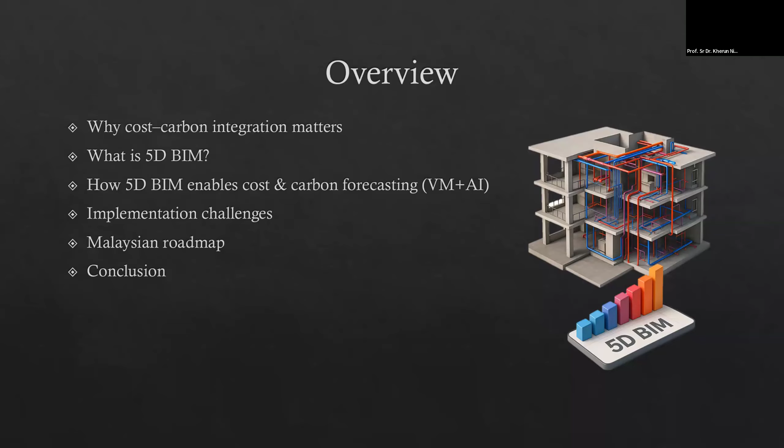I'm going to touch on the process of 5D BIM, and also in relation to that, we're going to look into the value management or value engineering exercise as well.

Globally, the construction sector is responsible for 38% of total carbon dioxide emissions. That includes both the energy used to operate buildings and the emissions from materials and construction. According to KPMG, embodied carbon, which is the carbon from cement, steel, or aluminium, transport and construction, is expected to overtake operational carbon by 2040 if nothing changes. Here in Malaysia, our national energy transition roadmap commits us to net zero by 2050, which means we must address embodied carbon in every new project, not just focus on energy efficiency.

Here's the critical insight: 70 to 80% of a building's lifetime carbon is already locked in during the early design stage, when we choose materials, the structural system, facade, and construction methods. Once these decisions are made, the carbon trajectory is almost fixed. This is why 5D BIM is relevant, and I want to say powerful, because it lets us see the cost and carbon impact before design is finalized.

So people often ask, why do we say 70 to 80% of carbon is already locked in during design? Firstly, material selection is made at concept design, and materials are the biggest source of embodied carbon. Concrete, steel, aluminum have high carbon factors. Timber, recycled steel are much lower. Once you choose the material palette, your carbon trajectory is essentially set.

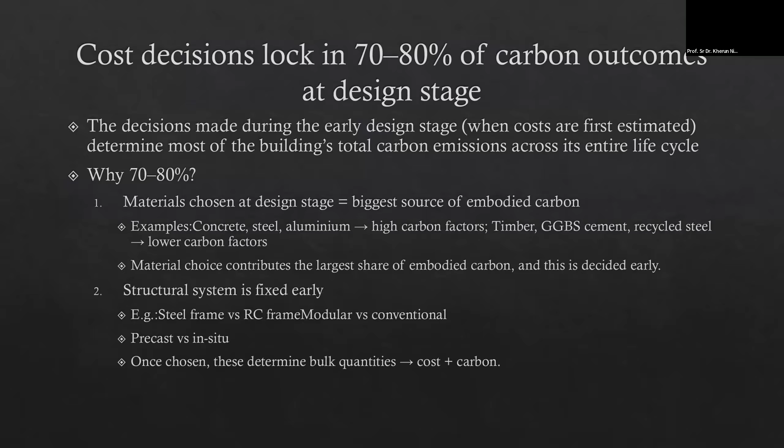Secondly, the structural system is fixed early as well: steel versus RC frame, precast versus in-situ, modular versus conventional. These decisions determine the bulk quantities, which determine both cost and carbon. Thirdly, the building geometry, floor plan, number of basements, facade ratio, orientation, all drive both material volume and energy performance. Once the geometry is finalized, it is extremely difficult to change later.

And finally, late changes are expensive or impossible, as we all know, they will incur variation. After tender or during construction, you cannot suddenly redesign a basement or switch from RC to steel. So the carbon impact is essentially set in the early design phase, which is why early stage 5D BIM analysis is so important.

What is 5D BIM plus carbon? When we talk about 5D BIM, we start with the basics: the 3D model itself, the geometry, the spaces, walls, structural elements, MEP system. 4D adds time, linking the model to the construction schedule so we can simulate the sequencing. 5D adds cost, quantities from the BIM model automatically linked to a cost database, giving real-time cost updates whenever the design changes. Now, when we extend this into sustainability, 5D plus carbon means every material in the model carries a carbon factor, just like it carries a cost factor.

So 1 kilogram of steel is 1.9 kilogram carbon emission, and 1 kilogram concrete is 0.12 kilogram carbon emission. This is the carbon factor.

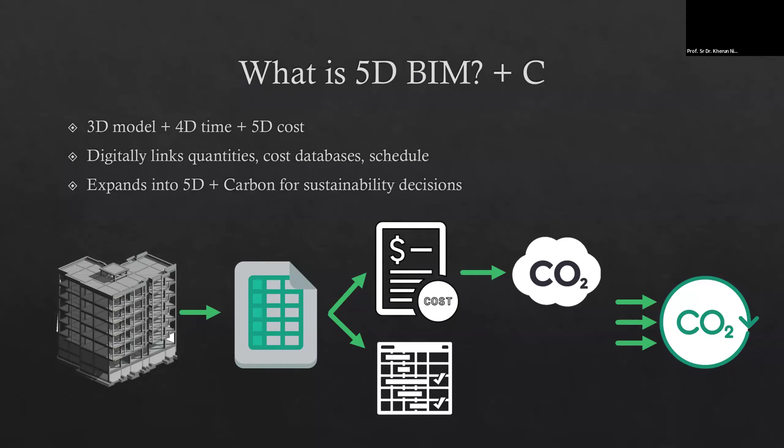So the same 5D BIM that updates cost automatically can now also update carbon automatically. In a sense, 5D BIM plus carbon equals a single digital model where design, cost, time, and carbon are all linked, giving instant feedback for sustainable decision making. And in BIM context, this is why 5D BIM plus carbon forecasting is powerful.

Because carbon forecasting gives us real predictive power. First, it allows us to test different design options while design is still flexible. At concept stage, we can simulate and compare if we switch from RC to composite, if we reduce facade glazing, or if we use other types of concrete.

Secondly, BIM highlights carbon hotspots like steel heavy floors or oversized MEP systems before they become expensive problems. Third, 5D BIM supports informed redesign. When carbon results come in, we can adjust layouts, materials, or systems in a targeted way rather than doing guesswork. In short, instead of reacting at the end, 5D BIM helps us optimize sustainability while the design is still changeable.

And let's have a look at this. These values represent the embodied carbon intensity, measured in kilogram carbon emission per kilogram of materials. Embodied carbon refers to greenhouse gas emission generated during extraction, manufacturing, processing, and transportation.

For example, steel is 1.9 kilogram carbon emission per kilogram. It is high carbon due to smelting and high energy use. In comparison, concrete is lower because it contains aggregates and water, but carbon increases when cement content rises.

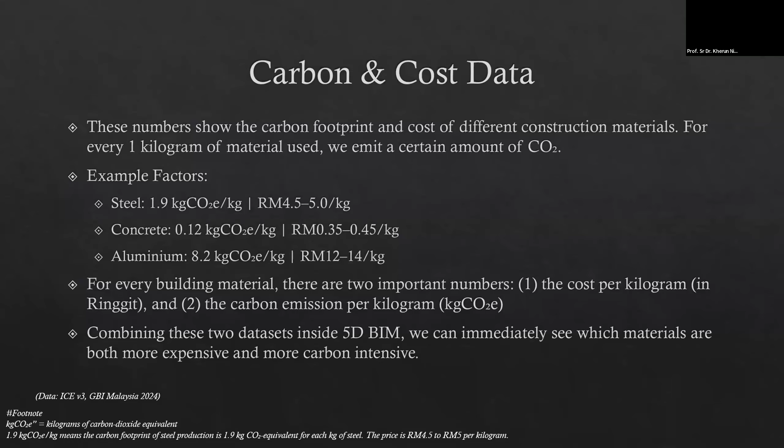So these ringgit or monetary values are typical market ranges used for demonstration purposes, not in practice. Material prices fluctuate frequently based on supplier, volume, region, and procurement method. So the purpose of this slide is to show that cost per kilogram and carbon per kilogram are not correlated. A low cost material may produce high carbon and vice versa.

So how does 5D BIM plus carbon work? Cost per kilogram shows how much we pay, and carbon per kilogram shows how much carbon dioxide we emit. When we combine this inside 5D BIM, we can compare materials not only by price, but also by sustainability. That is how 5D BIM guides better decisions.

So here's how 5D BIM actually works behind the scene. Number one, automated quantity takeoff from the BIM model. With BIM, every wall, slab, column, or whatnot has digital information. So instead of manually measuring drawings, the system automatically extracts all the quantities accurately. This is the foundation for both cost and carbon calculations.

The second step is linking BIM to cost and carbon data. Once we have quantities, we connect them to two critical data sources: a cost database that tells us the ringgit per unit, and a carbon database that tells us the kilogram carbon emission per unit. When we multiply quantity times cost and quantity times carbon, we instantly get the financial and environmental impact of the design.

Third, simulating design alternatives. The power of 5D BIM is that when you change one design element, such as material type or structure system, BIM recalculates everything within seconds. This allows us to compare multiple solutions and choose the one that offers the best sustainability value.

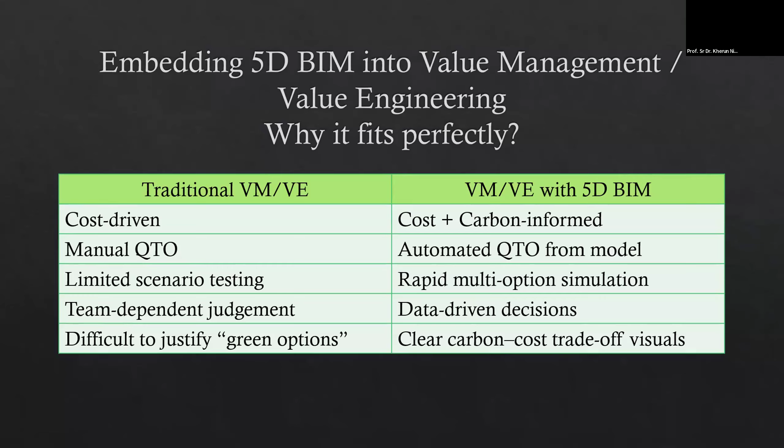By integrating 5D BIM into VM or VE workshops, all options can be assessed quantitatively, not based on intuition. BIM provides automatic quantities, material properties, carbon factors, and cost implications. So instead of debating opinion, the team evaluates data-driven alternatives. 5D BIM turns value engineering into value optimization, because every material, element, and decision can be evaluated on two axes simultaneously: cost and carbon. This means the VM workshop becomes more objective, transparent, and aligned with sustainability performance.

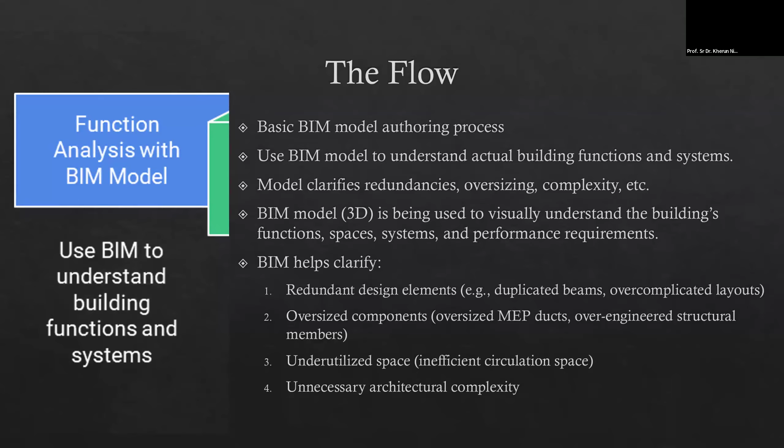So the flow I showed in this slide shows how we embed 5D BIM into the VM or value engineering process. I call it the flow. Let's look at the first one: the basic BIM model authoring process. Why does this step matter? In traditional VM, function analysis is based on drawings and assumptions. With BIM, function analysis becomes data-driven and visually accurate, eliminating guesswork. We can see the functions, systems, and conflicts clearly in 3D, which gives VM teams a more reliable baseline.

The next one is baseline automated QTO, or quantity takeoff, for the baseline. BIM automatically generates exact quantities of materials, so we can get accurate baseline cost and baseline carbon using material carbon factors. Why does this matter? VM decisions require accurate baselines. Manual quantity takeoff is slow and error prone, and BIM ensures zero duplication, real-time updates when the design changes, and one source of truth for cost and carbon. Without the correct baseline, VM lacks credibility. 5D BIM gives us a reliable snapshot of cost and carbon before any value options are explored.

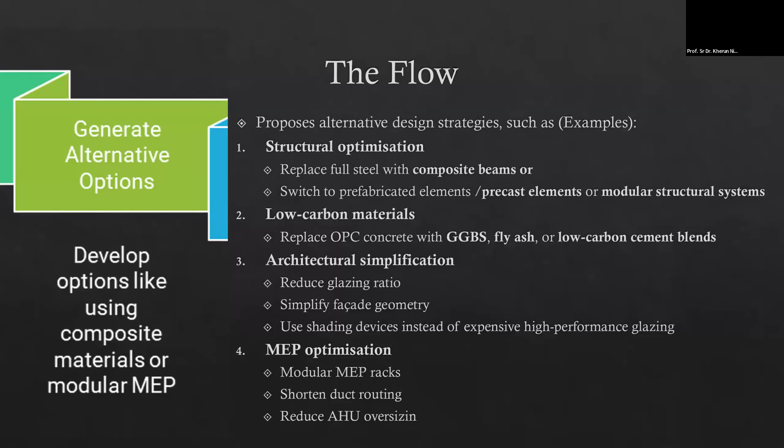The next one is generating alternative options. We develop options like using composite materials or modular MEP. This process gives alternative design strategies. Why does this matter? VM is ultimately about options. BIM allows options to be generated faster, explored deeper, and evaluated objectively. Instead of debating options verbally, BIM allows us to propose realistic alternatives based on quantifiable data.

The next one is 5D BIM evaluates the options. Why does this matter? Because VM decisions become data-driven, not based on intuition. It helps avoid value cutting and ensures value improving. This is where the magic happens: every option we test is automatically recalculated for cost, carbon, and time, and we can compare options in minutes, not days.

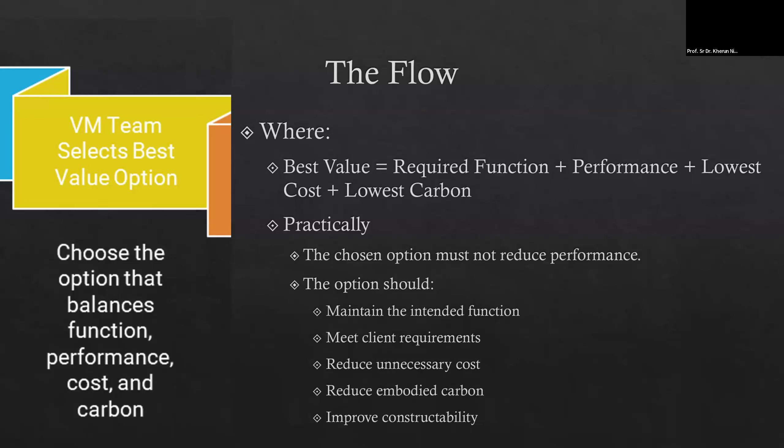Next, the VM team selects the best value options, because VM is not cost cutting. VM is maximizing value across four metrics: required function, performance, lowest cost, and lowest carbon. So 5D BIM gives the team a transparent cost-carbon matrix, and the best value option is now defensible, measurable, and aligned with sustainability goals.

The last one in the flow is to document the VM decision. Is it important? Yes, VM decision making must be defendable. 5D BIM provides evidence for audit trail, client approval, sustainability certification, like any green index tools or QS validation. So with BIM, our VM report becomes evidence-based. Every value decision is traceable, transparent, and quantifiable, and this document becomes a formal VM justification.

This is AI for pattern detection and design risk insight. Once the baseline cost and carbon are extracted, AI can immediately analyze the BIM model to detect patterns like oversized structural members, unnecessary MEP complexity, or facade elements with poor thermal performance. This helps the VM team identify where the true value problems are before we even start generating options. AI adds value here by identifying design inefficiency, highlighting high carbon hotspots, suggesting typical areas where similar projects had cost overruns, and predicting elements most likely to contribute to waste.

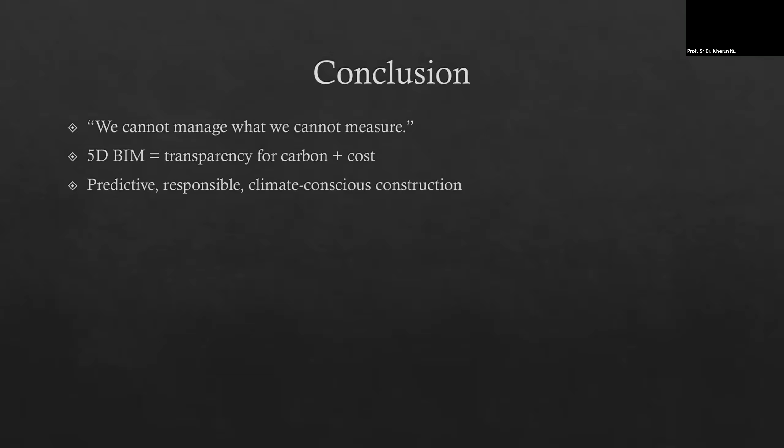As we move forward, let us commit to predictive, responsible, and climate conscious construction, where every decision is informed, measurable, and aligned with a sustainable future. With that, I thank you.

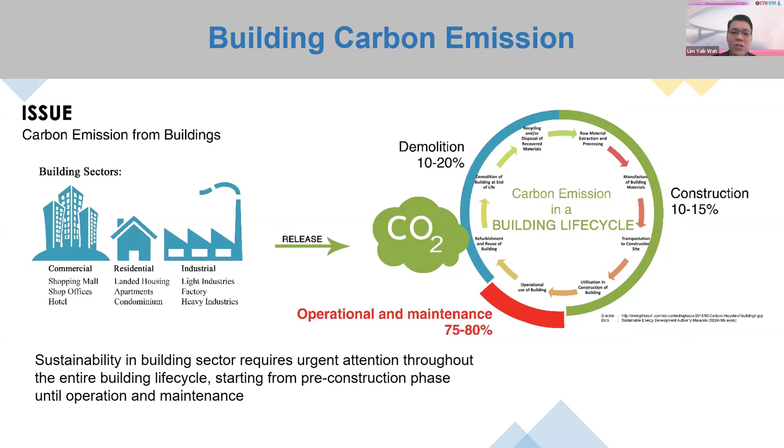So when we want to build for a more sustainable future, we need to look into the entire building life cycle, from the design, construction, until operation, until even demolition or refurbishment at the end. Because our design decisions at the beginning of the project will contribute very much to the operational stage, which is about 75 to 80% of the carbon emission.

The building industry is considered one of the most inefficient or wasteful sectors compared with other industries where they have adopted more advanced technology in terms of sustainability. That's why BIM, Building Information Modeling, has been recognized as a platform for sustainable or integrated building project design and delivery. BIM is a platform where every party in the building industry, including architects, QS, engineers, facility managers, share the same platform for information so that we can optimize the design.

The benefits of BIM include better collaboration, enhanced performance, optimized solutions, faster project delivery, and reduced wastage, as I just mentioned there's a great amount of waste from the construction industry. If you look at the photo on the screen, there's a BIM model of my office in the faculty.

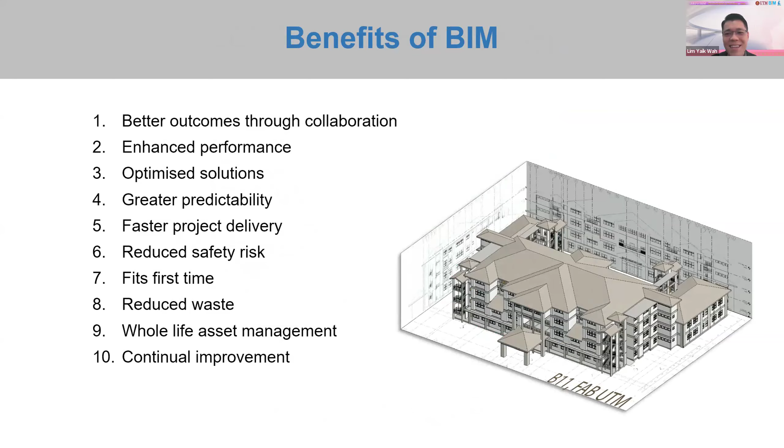Looking at BIM, I think most of us are familiar. There are 3D, 4D, 5D, 6D, and 7D, as just mentioned by Prof. Kherun Nita, about 5D BIM, which is for cost estimation, and 4D is about scheduling the time. But today I want to focus more on sustainability, which is the 6D BIM, using BIM as a sustainability design and analysis tool.

For example, then go for green building certification like LEED, GBI, GreenRE, and so on.

In BIM, we have different levels of development. Like in the conceptual design stage, we call it LOD 100, where it's just a very approximate geometry, while LOD 200 is more schematic design, and 300 has more precise geometry. 350 is for tender coordination, 400 during construction and fabrication, and 500 is as-built.

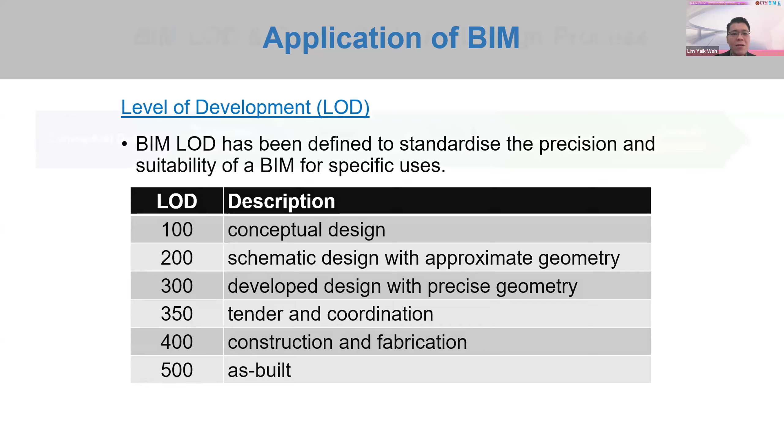So today I want to try to show how LOD matches with the green building design process using BIM. We know in a project design, not only the conceptual design, we have schematic design, development, tender and coordination, construction, as well as as-built.

So at LOD 100, that means the BIM model is just a very conceptual massing, even without any openings, any structure, any facade design, it's just a massing. So at LOD 100, we can use BIM to do conceptual form massing, orientation, and site context analysis. The performances related to 6D BIM, like site analysis, solar study, macro wind flow, building form optimization, and green area.

While at LOD 200, where we have the form and facade, solar shading, and a more approximate geometry, then we can do the solar study for shading devices, daylighting, natural ventilation, and even zoning of the spaces.

Remember, at the early stage of design, any decision or changes will have a high impact on performance, but very minimum cost implication on design changes. So if we make the decision right at the beginning, it will determine how the building operates or performs later on. Compared with the later stage, if you want to change the design, it will require a lot of variation orders or even demolition or reconstruction of the building.

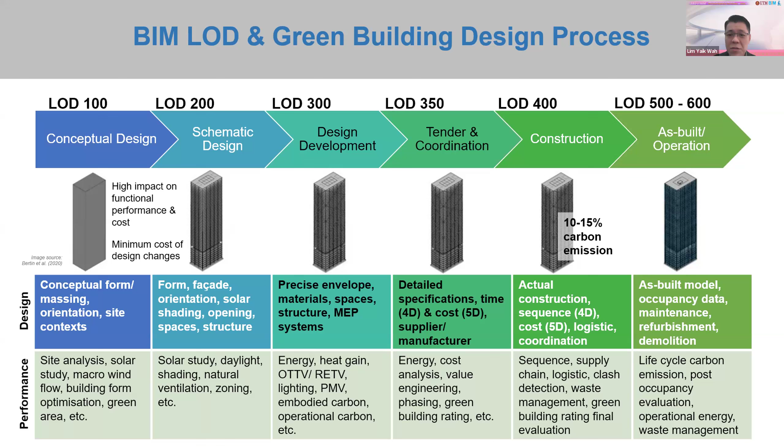While at LOD 500 to 600, which is as-built or the operational phase, we can look into the life cycle carbon emission, the post-occupancy evaluation, and continue to monitor the building performance using BIM. And that accounts for 75 to 80% of carbon emission. But remember, at the design stage, even at LOD 100, 200, that will contribute a lot into the operational phase.

So here we sum up how we can use BIM throughout the different stages in the project life cycle to do different kinds of 6D BIM analysis in order to design for more sustainable futures. And these are just some examples of 6D BIM tools, for example IES, Design Builder, or Ecotect.

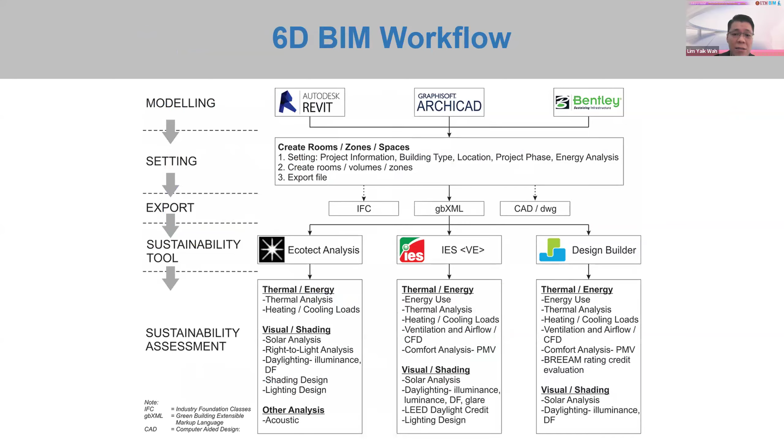And this is the workflow of 6D BIM, where we can export the model from the BIM modeling to gbXML and import into some of these sustainability analysis tools for thermal analysis, visual, or energy.

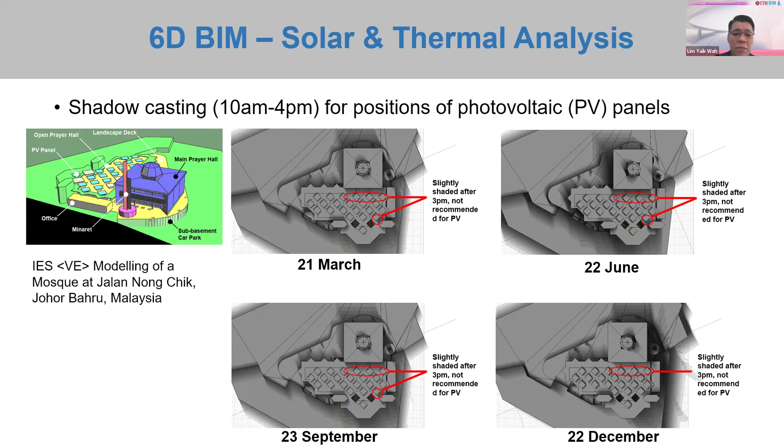Just some quick examples of how we can do solar analysis using a BIM model compared with the actual construction. And these are all real projects where we did even thermal analysis on how the shading, the placement of the photovoltaic panel on top of a mosque building, which has been completed.

And this is another example of using CFD to see the macro wind flow and also the PMV thermal comfort in the buildings, and this energy analysis.

Next I want to talk about some of the research on BIM for sustainability. In our research team, we look into green building evaluation, BIM, and also computational algorithms. So we try to integrate these three aspects into our research, where we start with the BIM model.

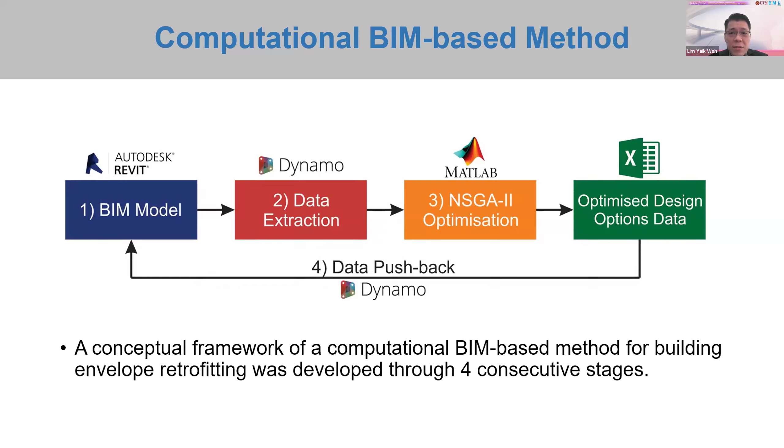Then we extract the information from the model using Dynamo, which is a visual programming software. And then we input it into MATLAB using the NSGA2 optimization algorithm, which is a genetic algorithm for optimization. And then with the optimized result, we push back to the BIM model using Dynamo so that it automatically updates the BIM model.

So this is an example of the workflow that we have done in Dynamo as a visual programming tool, and the example of the model that we've done in Revit. And with one click in the Excel spreadsheet, because it's linked with Dynamo, all the information related to the building facade, the U value, the VT, are all captured automatically with one click.

And all this info is extracted from the Revit model. From there, we can use it to calculate the green points for the OTTV, and straight away you can see the point for the RETV. So this is how we can use BIM for information management and extract the data to do calculations or analysis, so that we can automate or simplify this whole process for green certifications.

And this is a real case example that we have done in my office building at UTM. This is where the BIM model has been constructed, and then we use that workflow to optimize the facade design.

We come up with two scenarios. One scenario is that we want to optimize window only, and the variation of the window area increment or decrement was limited to 20% variation.

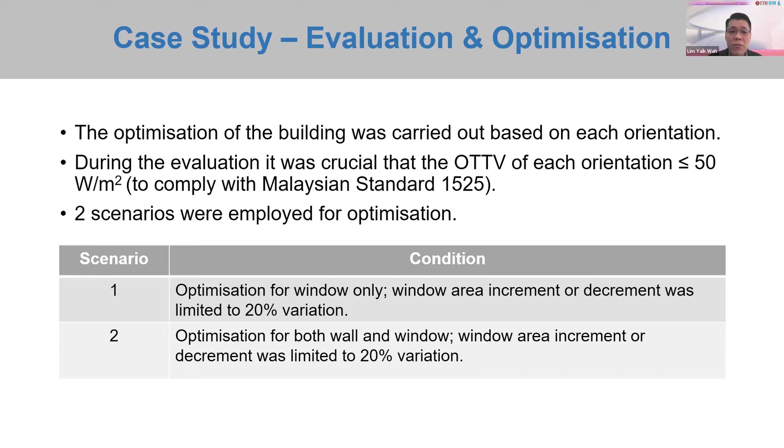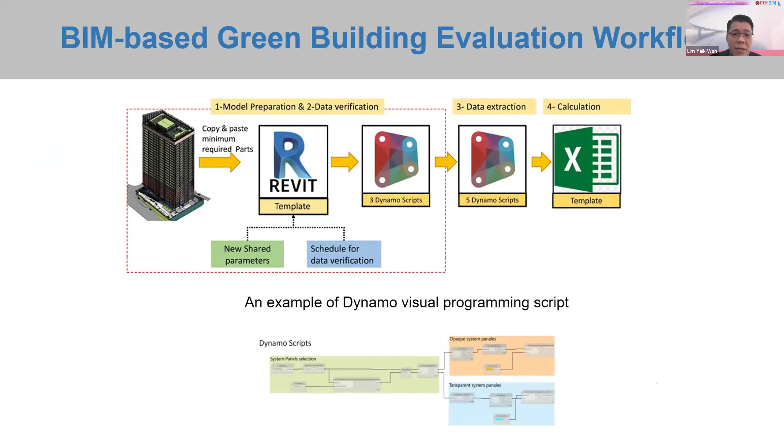Then we further study with other case study buildings, for example the TRX Project Unity Tower in KL, using a similar workflow, but not only looking into the OTTV - we also look into the GBI performance, including OTTV, energy performance, and also materials assessment. Like for example, in GBI there's a criteria on the recycled materials.

There's a criteria on the use of components of regional materials within the local industry. So that's where we can do material take-off in the BIM Revit.

We created the schedules for material take-off. Then from there, we calculate using Dynamo, then we input the calculation into the Excel spreadsheet in order to give the results of how many score they can achieve in the GBI.

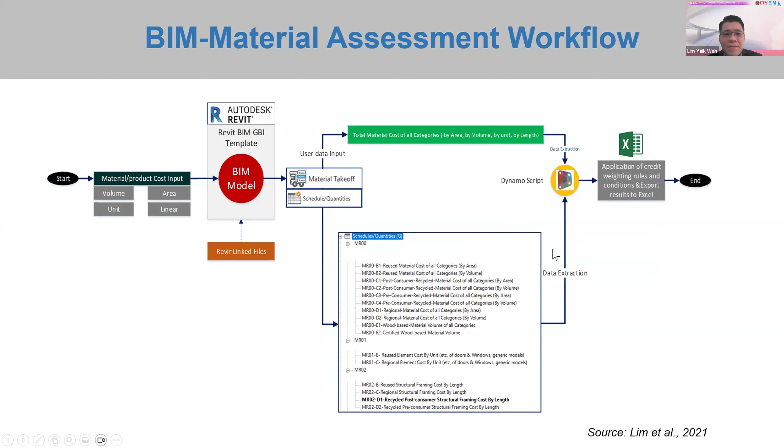To further explore this research, there's another project funded by the Ministry of Higher Education under the PRGS grant. Then we not only looked into Dynamo as a visual programming tool, but we went into our own programming to develop a plugin, an add-in into Revit.

In this project, we come up with a BIM model. Then with templates like the RTE, RFA files, we automate the data extraction and process. Then we created a plugin, a Revit add-in we call BIMGes, in order to automate the process to evaluate based on the green RE criteria: NRB 1-1 OTTV, 1-3 building envelope, NV, MV, daylighting, and electric lighting.

We link it with a website with a database where users can download the templates and also the material properties. We have a library where, for example, users can download the Windows library, the wall material library, and so on. Basically all of these are the RFA file, the families file in Revit.

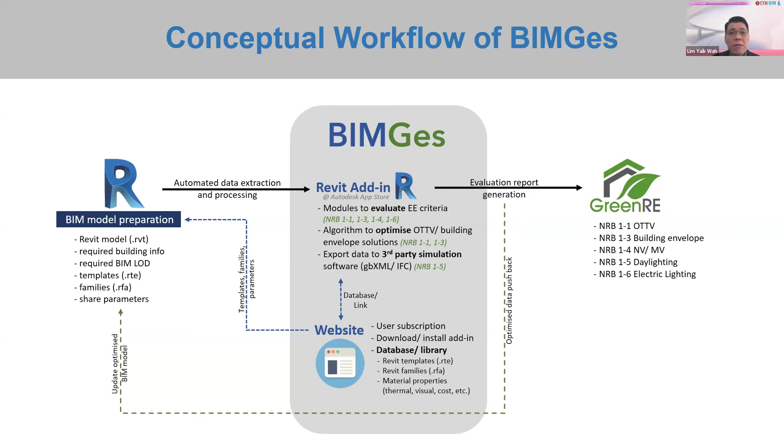And again, we automate the pushback of the optimized design into the Revit model. This add-in we developed using Python programming, rather than using VPL, so that we can develop an add-in that we can install into Revit. This is the example I want to show in the video.

So here's the example of a model that has been developed in Revit. This is the add-in we have created and installed into Revit. This is the user interface where it will automatically detect the scenario of the building design, whether it's an aircon or non-aircon building, based on the zoning that you have modeled in Revit.

From there, we can detect if there is any interblock shading from any floors. Then click next - if you do model checking, you can see that all the walls that have been detected are highlighted in different colors to represent different orientations.

And then straight away, it gives all the results of the OTTV with just one click, and tabulates all the results for each floor and each orientation, which can be exported to Excel spreadsheets.

Because when the green building consultant needs to submit for green certification to green RE or GBI, they need to tabulate floor by floor. So we customized the reports to suit the formats to tabulate all this calculation floor by floor. But the user doesn't need to do it by themselves, just a few clicks.

But not only that, in step 4 we can even optimize it using the NSGA tool. Then we can optimize the composition of different kinds of building materials or window sizes in order to reduce or achieve certain compliance.

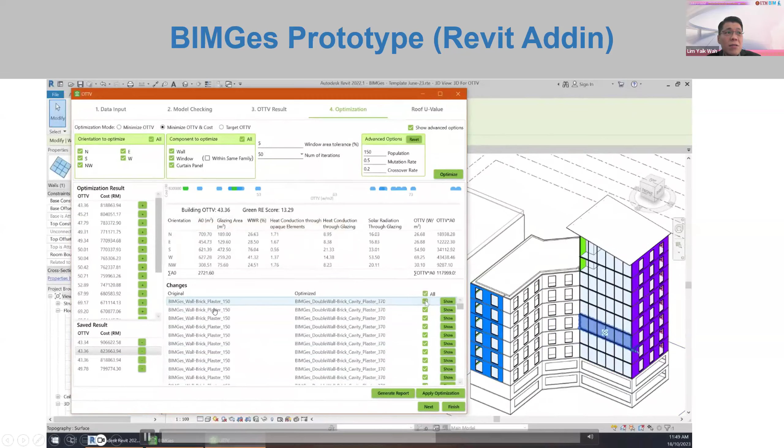This is how we can look into the changes. It will tabulate all the original and optimized results, and we can click show. It will display in the 3D model which part has been optimized, which part has changed, and what materials are involved, all based on the libraries we have in the Revit model.

We can also export into an Excel spreadsheet, and it will give the results. Just now was the OTTV; now I'm showing the building envelope, like how many percent of the west-facing facade or window is shaded with a shading device. All this automatically calculates the points, and we can export into a PDF file that can be submitted for green certifications.

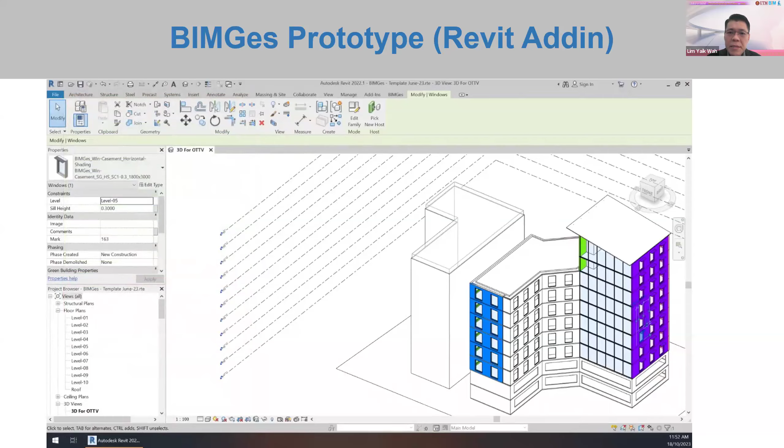From here, we are exploring the potential of using BIM and programming algorithms to optimize the design, not only evaluation but also design optimization, and then generate reports for green certifications or any design report needed. The good point is that all the optimization can automatically push back into the Revit model, updating it for design evaluation.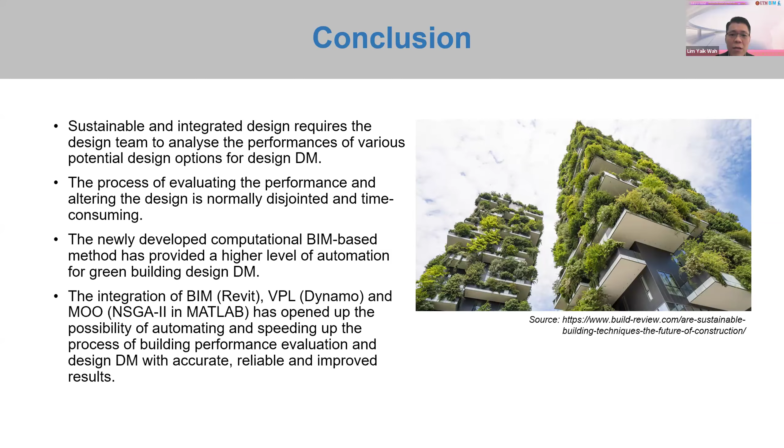Many designers say it is very time consuming to do all this analysis, but with the use of BIM and computational algorithms, it can actually become much more effective. BIM is a platform that can provide a centralized database to optimize the project design and delivery.

That's all from me. Thank you very much.

Thank you so much, Associate Professor Dr. Architect Dr. Lim Yaik Wah. From my understanding of the keynote, the points lead us into the future of sustainable design, where BIM becomes a powerful catalyst for smarter planning, resource efficiency, and low impact development using the power of automation. More specifically from what we heard, the use of computational BIM-based methods. I think this keynote shows how digital design intelligence can guide us towards more resilient, sustainable built environments.

Well, actually we have one question in the chat box, Dr. Lim, but since we are trying to stick with the time, perhaps we could come back to the question later if time permits. Again, thank you very much, Associate Professor Dr. Lim Yaik Wah, for the excellent keynote. Thank you, Dr. Lim. Thank you. All right.

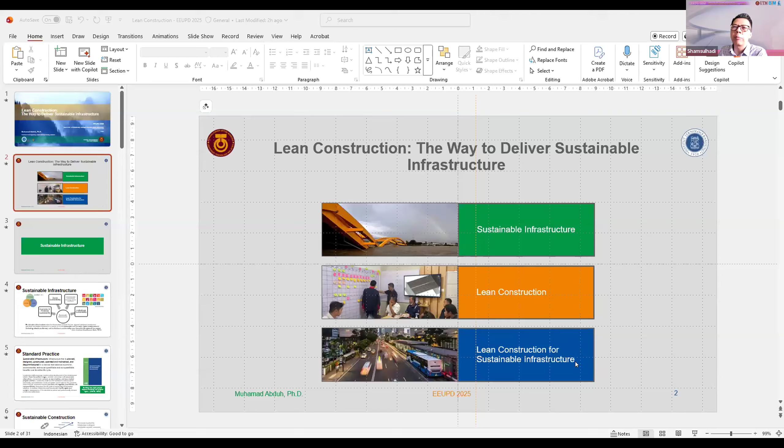Please welcome, Prof. Okay, thank you, Pak Samsul. Welcome, Pak Abduh, nice to see you. Can you see my slides? Yes, yes, Pak Abduh. Okay, so good morning, Assalamualaikum warahmatullahi wabarakatuh. I think you have to change the first screen. Presenter view, okay, wait, how about this? Yes, you can try. Okay, yes, correct. Thank you, Pak.

Okay, good morning. Assalamualaikum warahmatullahi wabarakatuh. It is my pleasure, and also an honor, to be invited to talk in this conference. Thank you, Pak Shamsulhadi, for inviting me. I would like to continue our discussion this morning.

I think the two previous keynote speakers already talked about how to design and simulate the achievement of sustainable infrastructures, mostly related to BIM technology. So my question, and the motivation of this talk, is how can we deliver that kind of very specific specification and high performance that we need to achieve in sustainable infrastructure?

So I would like to propose lean construction as the way to deliver sustainable infrastructure. This talk has three portions. First, we'll review a little about sustainable infrastructure. In the context of Indonesia, I think we need to also introduce resilient infrastructure, not just sustainable infrastructure. Then I would like to introduce what lean construction is, and at the end, describe how lean construction can deliver sustainable infrastructure.

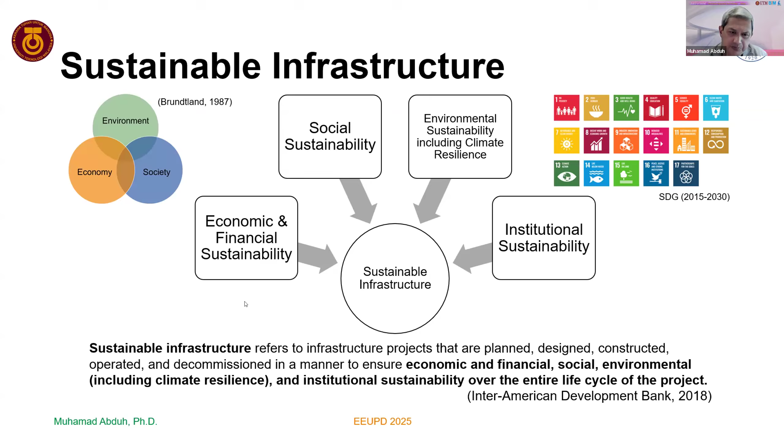Not only that, we should also consider all reasonable alternatives, including no construction—that is, do nothing—and then maybe several constructed project solutions. We also have to include life cycle cost analysis in this. But this document emphasizes that we have to not only build the project right, but also build the right project in the first place.

This is very important because we're talking about the value of the project. We should have a definition of the value of the project, and then we can deliver that value during the project, and in lean construction nomenclature, without wasting many resources.

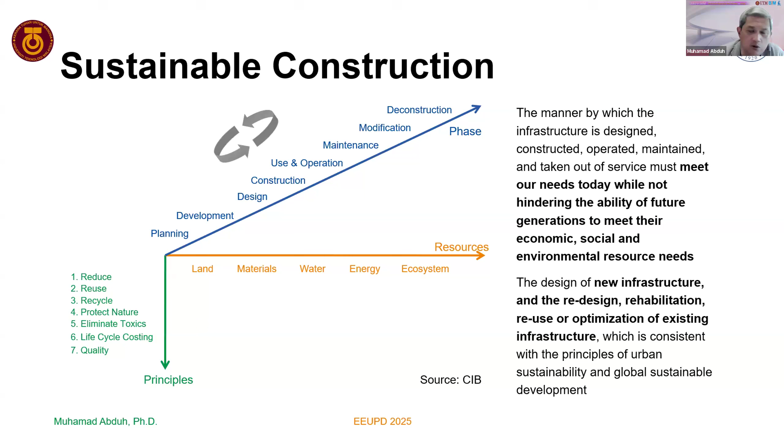So this is the sustainable construction framework from CIB. I think it was developed a long time ago as a platform to deliver sustainable infrastructure. So for all the life cycle phases of the project, we should consider all the resources, and we should apply what's called the sustainable construction principles: reduce, reuse, recycle, protect nature, eliminate toxics, life cycle costing, and also still focus on quality.

So this shows us that Indonesia is not only focusing on sustainability in the long term, but I think we still face many problems on the way to achieving that sustainability. Therefore, we cannot only focus on the long-term goal, but we also have to focus on what's called the resiliency of our infrastructure, because of these natural disasters.

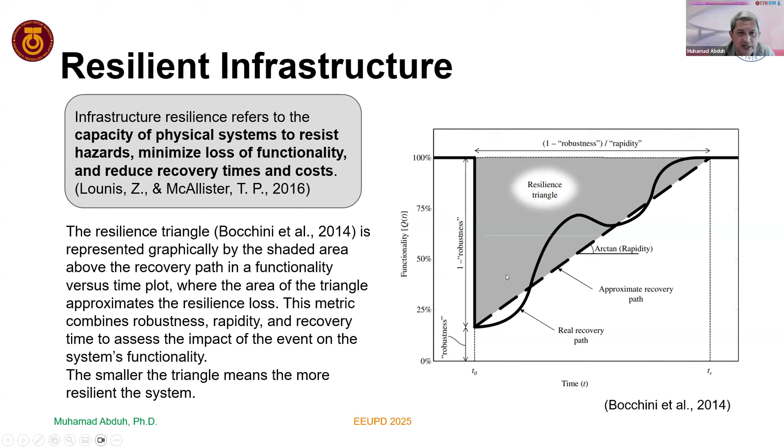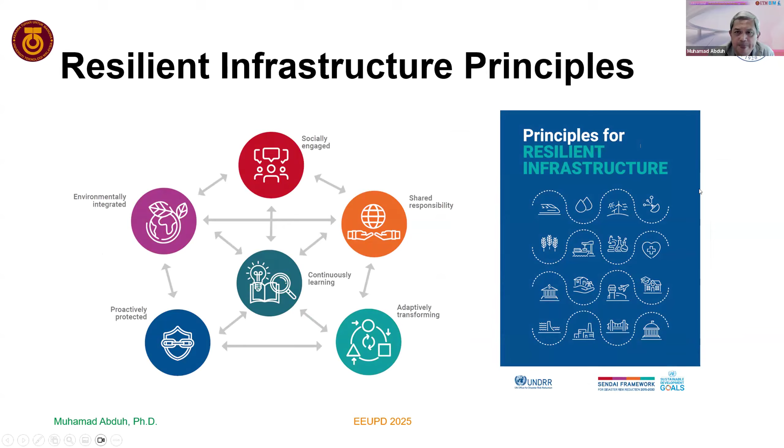Okay, so we also have to see this principle for resilient infrastructure from UNDRR and also from the Sendai Framework, that we not only focus on sustainability, which is environmental and social, but also we have to make our infrastructure more resilient.

There have been several discussions about the difference between sustainability and resiliency, whether resiliency is part of sustainability or if they're distinct. Actually, there is a paradigm shift—I think starting in 2014, we discussed different approaches for sustainable infrastructure and resilient infrastructure.

But in 2016, I think we tried to see the overlapping between sustainable infrastructure criteria and resilient infrastructure. However, by maybe 2019, we concluded and agreed that resilient infrastructure should be the first step toward sustainable infrastructure. So in Indonesia, we try to adopt this paradigm.

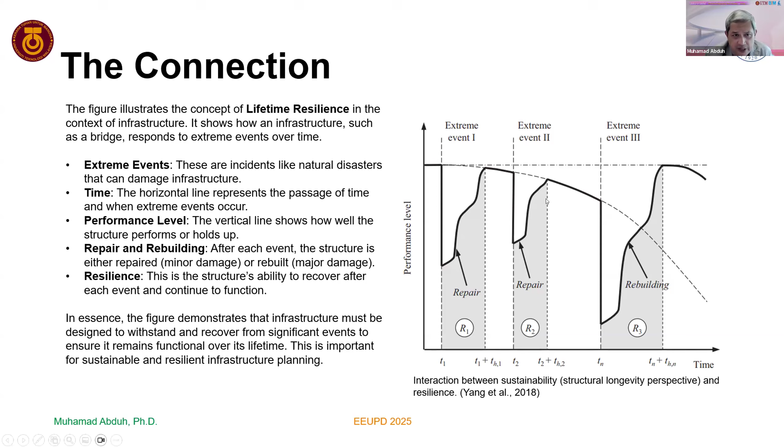We can have good infrastructure after construction, and then maybe serviceability is reduced, but we can go back and try again. If there is another disaster, we can go back again, something like that. So I think this is the connection between resiliency and sustainability.

So in Indonesia, the government issued several policies, for instance, the presidential decree regarding the master plan for disaster management, and also regarding the implementation of SDGs, mentioning the importance of resilient infrastructure to achieve the SDGs. Actually, for construction itself, there is a ministerial decree from the Public Works Ministry guiding how to implement sustainable construction, and it mentions the introduction of lean construction as the way to achieve that sustainable construction.

So, ladies and gentlemen, we now go to lean construction. I would like to explain what lean construction is.

Lean construction was developed since 1992 by this gentleman, Lauri Koskela, on the right side. At the time, he joined with Glenn Ballard and Greg Howell to establish the Lean Construction Institute in 1997.

The definition of lean construction right now: lean construction is a project delivery process that uses lean methods to differentiate it from other construction methods, maximizing stakeholder value while reducing waste by emphasizing collaboration between teams on a project. So the keywords here are value, waste, and collaboration between the project team. The goal of lean construction is to increase productivity, profits, and innovation in the industry.

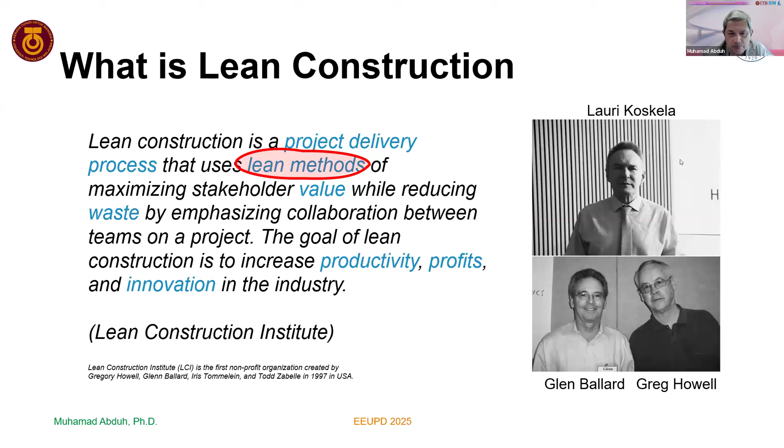What is the need for lean construction? In 1992, there was a study by Glenn Ballard. At the time, he went to job sites and contractors, asking whether the tools for managing projects were okay or not. Everybody mentioned that it's okay, it's already there, already established a long time ago.

So they really used those tools. But when Glenn Ballard asked about how many plans were completed in a week, the number coming back was 54%. It's always like tossing a coin, like 50-50%. So I think this is the problem of construction.

Also at that time, the Construction Institute found that most of the time we only manage the project, but forget about how to produce the product. So I think project management tools are okay, but I think we miss what's called production management.

If we compare the manufacturing industry and construction industry, we can see that the performance of manufacturing is way better. In terms of value-added activity, construction only achieves 10%, while manufacturing can achieve 62%. Regarding waste, in construction I think 57% of activity is categorized as waste, while in manufacturing it's only 26%. Therefore, we need to learn from the manufacturing industry.

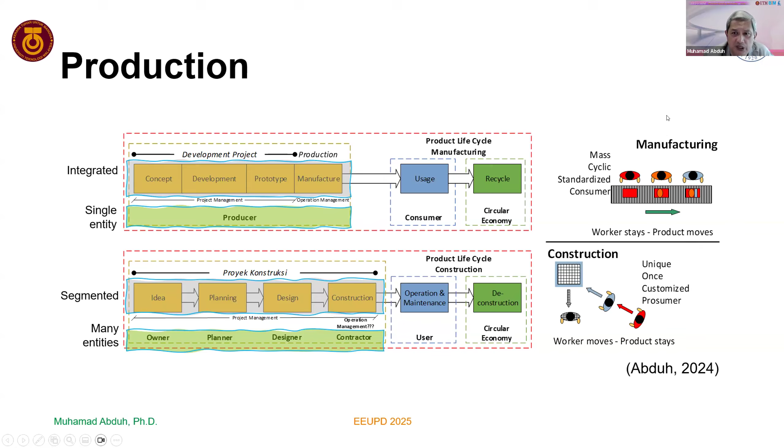So I think the lean production knowledge from the manufacturing industry can be helpful for our construction industry. But still, we have to change the knowledge and practices a little bit from manufacturing, because the characteristics of manufacturing and construction are different. That's why we came up with our own terminology: lean construction.

Moreover, many of us only focus on the meso level. We have a hierarchy: micro, meso, and macro. Managing the project is at the meso level, and what we forget about is operation management. Project management deals with a unique product, yes, but operation management is not a unique product—it's cyclic, or many similar components of the product. That's why the practice and knowledge of the manufacturing industry can be applied in this direction of the hierarchy.

So in terms of how we can use that information, that practice and knowledge, we have to adapt manufacturing knowledge—for instance, the lean thinking principles from James Womack. He mentioned 5 principles of lean thinking: first, specify value; identify the value stream; make value-creating steps flow; then customer pull; and also perfection. These are the lean thinking principles.

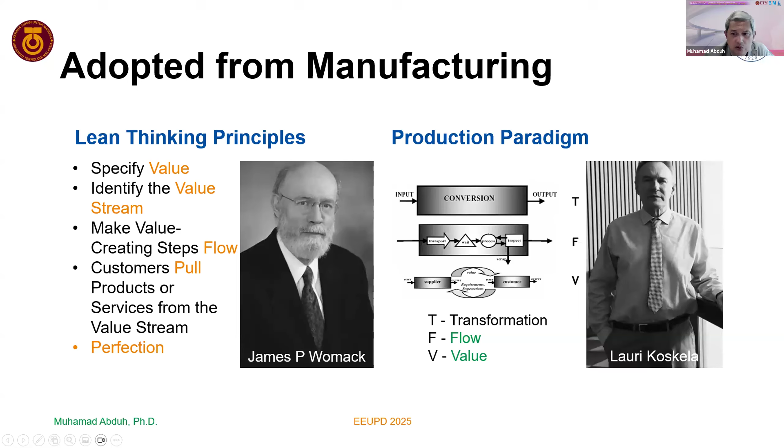As Lauri Koskela mentioned, in terms of production we have to change our paradigm. Usually we see production only as a conversion from input to output physically - he called it the transformation mindset. But we have to also integrate the value mindset, so the result of the conversion achieves the value of the customer. The third one is F, flow - during the conversion to achieve value, we have to reduce waste and make the process flowing. This is the important key of the adoption from manufacturing to construction industry.

Since 1992, there are many new knowledge practices and methods developed by the lean construction community. If we try to map it, it's too many things. Right now they try to categorize all the knowledge into philosophy, principles, methods, and tools. The important thing, of course, is the philosophy - there are only 3 philosophies of lean construction. First is respect for people, then maximize value while minimizing waste, and the last one is continuous improvement.

LCI has also established what's called the focus areas of lean construction. The first one is operating system - related to methods, how to deliver, and then organization regarding human resources, and also how to do the commercial between the parties. We call it integrated project delivery. I think Dr. Lee mentioned about this in his conclusion.

So these are the popular methods during the design phase and also construction phase. Maybe some of you don't know yet about this - I think this is relatively new. So I would like to invite all participants to try to learn about this, because this is what we need to master in terms of how to deliver the value we need without causing much waste.

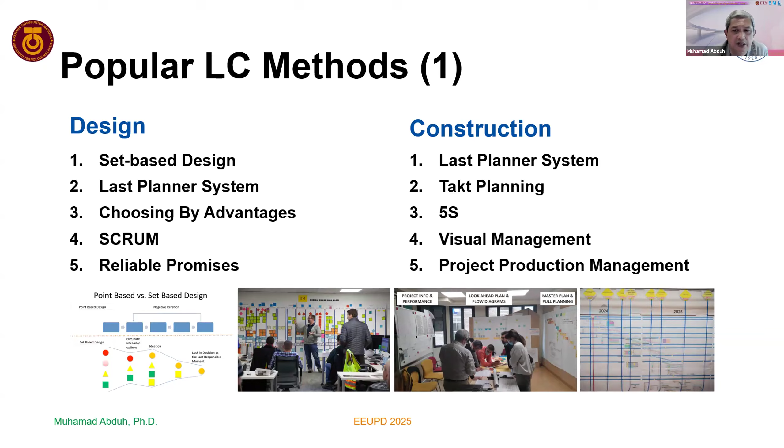During construction also, we have the same methods like the last planner. The new one is takt planning, adopted from German methodology - how we can deliver, for instance, one story each week. Every week we can deliver one story, for instance. 5S also comes from the Japanese tradition, visual management. Also, the last one is project production management.

Not only the operating system, lean construction also introduces what's called collaborative project delivery. Compared to the traditional design-bid-build process, we have what's called IPD, integrated project delivery, and then progressive design-build, and also target value delivery. Most of the project delivery should come from the owner side, and owner roles are very important in this.

If we compare the previous project delivery methods, for example design-bid-build, EPC, or PPP, in those methods the role of owners is very limited - owners only give the risk to the contractors or the developers or to the design-builders. But in collaborative project delivery in lean construction, owners should take a significant role in getting all participants to come in at the beginning of the project and develop the project together. So it is not only the project of the contractors, but a project of the whole team.

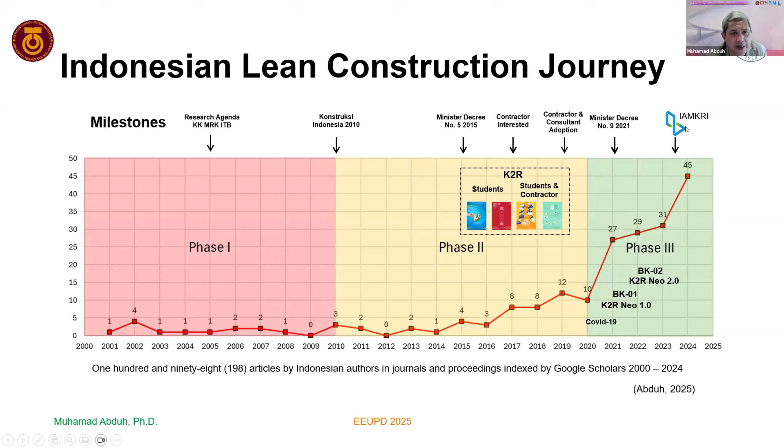This is the principle, because one philosophy of Lean Construction is maximizing value while minimizing waste. The problem is, what is the value? I think sustainability is the value. At that time, there was discussion about whose value it is.

Is it only the value of the one who pays, or maybe wider than that? Maybe we can also include not only the paying customer, but also society, and maybe now nature. Therefore, we can conclude that value relates to sustainability, not only the paying customer.

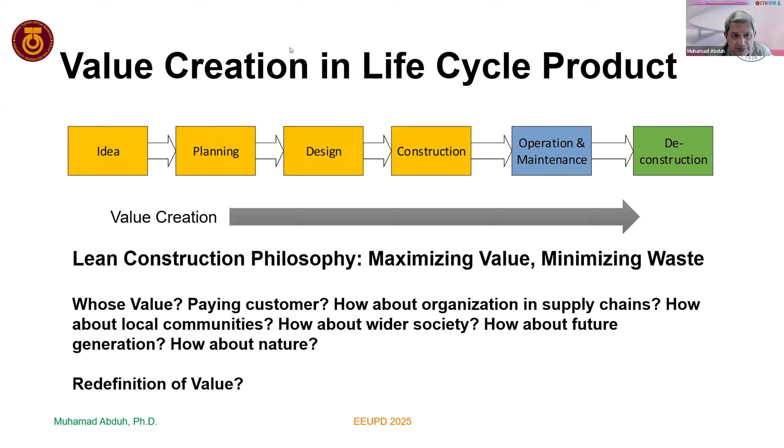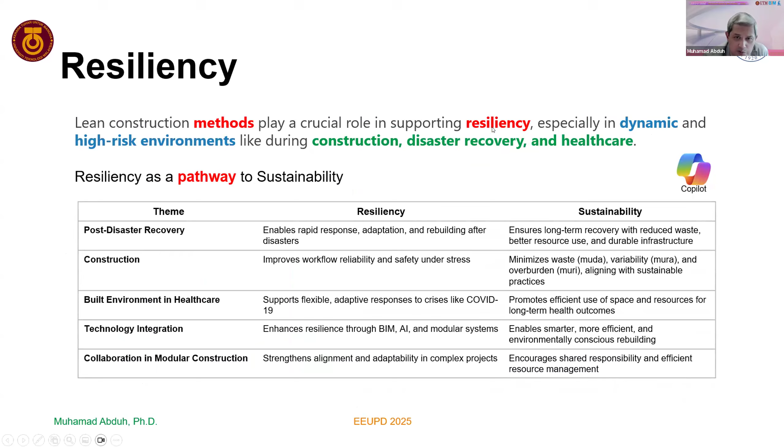And in terms of resiliency, Lean Construction methods play a crucial role in supporting resiliency, especially in dynamic and high-risk environments like in Indonesia. Maybe not in Malaysia, I don't know about that. Maybe we can discuss that.

So in summary, ladies and gentlemen, for the Indonesia context, Lean Construction is the way the construction industry should operate in order to achieve resilient infrastructure as the pathway toward sustainable infrastructure. So for that, I conclude.

In BIM Research Group, our focus is on advancing digital construction and smart project delivery through the application and development of BIM technologies. Over the years, we have forged strategic partnerships with select organizations from both academia and industry, fostering collaborations that contribute meaningfully to society. We undertook research and development initiatives in alignment with the university's aspiration to become a leading reference center for science and technology applications. As a research group, we welcome any forms of collaboration by members of the public, companies, or organizations. We are actively looking to forge new partnerships and avenues where we can lend our knowledge and ideas for the improvement of society.

Just last year, we launched our tagline, Beyond BIM. It reflects our vision to lead digital transformation in the built environment through innovation, education, and industry collaboration. We hope with your continuous support, we would be able to reshape construction by moving past traditional BIM application into new frontiers of knowledge and practice. Come and talk to us, drop us an email, and we'll see how we could work together. Beyond BIM, from the BIM Research Group, University Technology Malaysia.

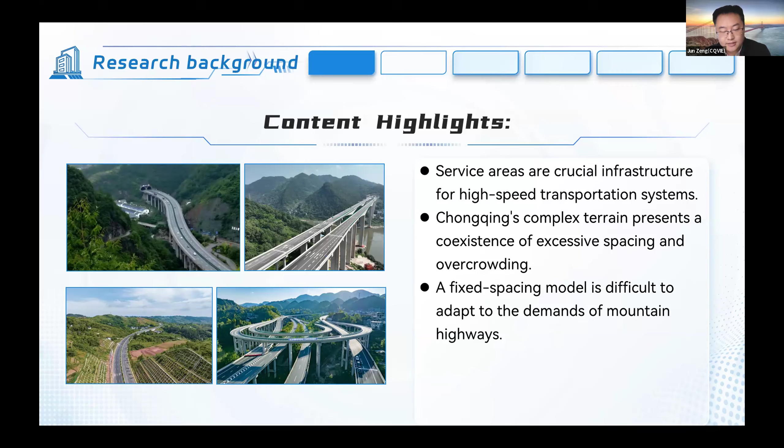This imbalance is what motivated our research. Our main objectives are threefold. First, to analyze the key factors affecting service area spacing in mountainous regions. Second, to develop adaptive spacing strategies suited to Chongqing's unique terrain and traffic patterns. Third, to provide a scientific reference for future expressway service planning in Western China and other mountainous regions. This research aims to bridge the gap between engineering standards and real-world geographical conditions.

We used a mixed method approach combining both quantitative and qualitative analysis. Simulation tools such as AnyLogic, PKPM Energy, and Matlab were used to test different spacing layouts and energy demands. Finally, we conducted field surveys and driver interviews to understand real user needs and fatigue behaviors.

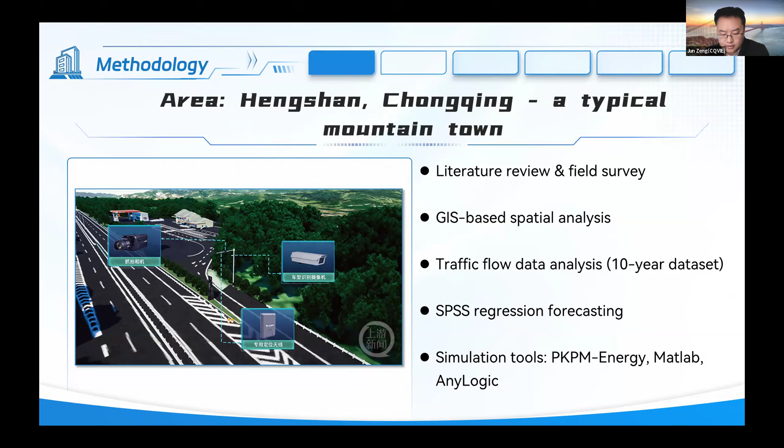We identified 7 main factors influencing service area spacing: drivers' physiological and psychological needs, manual rest and fatigue prevention, fueling, water and maintenance requirements, traffic volume and vehicle composition, environmental protection and cultural integration, construction and operational economics, land use efficiency, and topographical and geological constraints. Among these, driver fatigue and terrain conditions proved to be the two most critical determinants in mountainous areas.

Let's take a look at the situation in Chongqing. Field surveys show that the distance between some service areas exceeds 70 kilometers, such as on the Lanhai Expressway. This is far beyond the recommended safe interval and forces heavy trucks to stop illegally along the roadside for rest or auto refill. On the other hand, some low-traffic corridors have service areas located too closely, leading to low utilization and repeated investment.

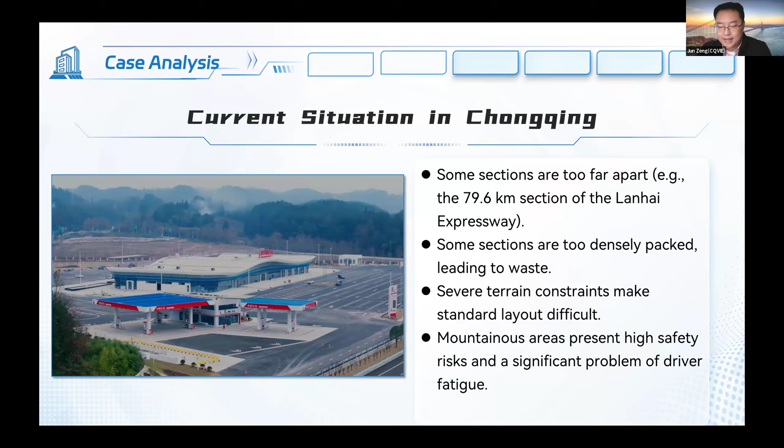In summary, the one-size-fits-all model simply doesn't work here in Chongqing. Internationally, we found that in Europe and the US, rest areas are spaced about 5 to 25 kilometers apart, while full service areas are around 20 to 30 kilometers. Japan keeps a standard of 30 to 60 kilometers, combining service and parking functions efficiently. In China, most provinces use 30 to 60 kilometers for service areas, but adjust spacing based on geography. These comparisons show a clear trend: developed regions tend to use shorter and denser spacing, ensuring frequent rest and safety stops. However, Chongqing's mountainous terrain and higher construction cost mean we need selective adaptation, not blind imitation.

Based on our analysis, we propose 4 adaptive strategies. Regular sections: spacing of 30 to 50 kilometers for standard terrain. High-risk sections: reducing spacing to about 15 kilometers with added water and cooling facilities for heavy trucks. Terrain-constrained sections: adopt flexible layouts such as linear, shared, or multi-level service areas to save land. Flat or resource-rich sections: build dual-side, fully functional service areas with potential for commercial expansion.

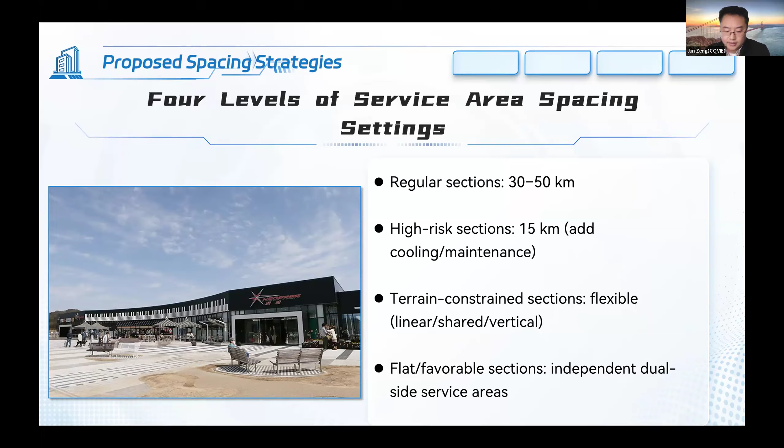In practice, we recommend a main service area plus auxiliary parking area plus small rest node system. This multi-level structure ensures that every 15 to 20 minutes of driving, a driver can find at least one form of service facility. Planning should follow the principles of low land acquisition, low energy use, and high flexibility. Also, future layouts must reserve interfaces for renewable energy systems, such as EV charging stations, hydrogen fueling, and smart grid access.

Let me summarize our key findings. The traditional fixed interval model is not suitable for Chongqing's mountainous expressways. So a multi-factor integrated model combining traffic, terrain, human, and economic factors is essential.

Zone differentiation and flexible spacing are the most effective planning strategies.

Existing practices in Chongqing, such as Rulong and Tongliang service areas, show good progress but still need optimization. Future service areas must consider scalability, digital management, and new energy integration to meet sustainable development goals. This research provides both theoretical and practical guidance for mountainous expressway planning in Western China.

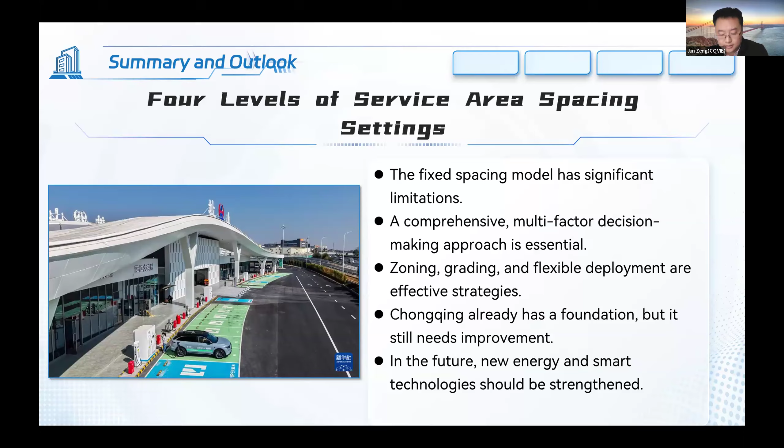So thank you very much for your attention.

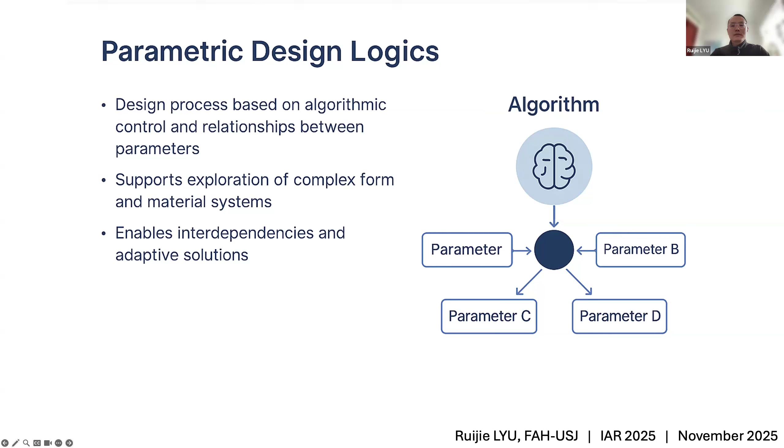In computational design, we are often faced with multiple conflicting objectives that need to be balanced. This is where multi-objective optimization, MOO, comes into play. MOO helps us navigate these competing goals. For example, when designing a building facade, we might want to balance daylight access with thermal performance.

MOO uses evolutionary algorithms to explore various design solutions that achieve the best balance between these objectives. Tools like Octopus and Wallacei in Grasshopper allow us to perform this type of optimization, generating a range of solutions that can be evaluated and compared to identify the best one.

The third key element in parametric design is human-computer coagency. This concept challenges the idea that design is solely human-driven or computer-driven. Instead, it's a partnership. In this model, the computer helps generate design options, but it is up to the human designer to make the final decisions, curating the output based on the specific context of project needs.

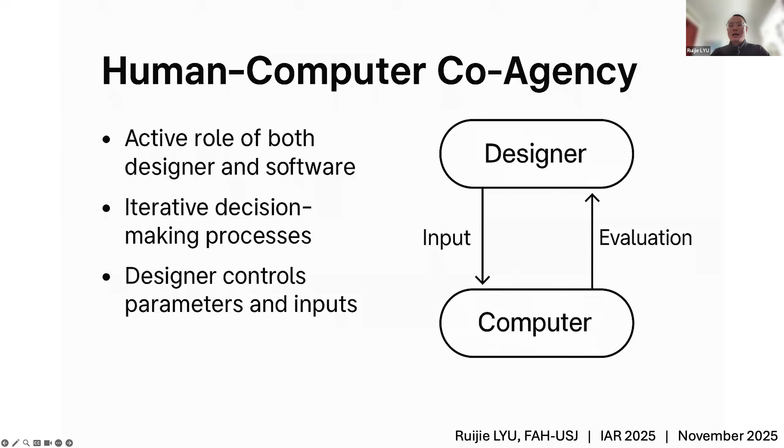Tools like interactive evolutionary algorithms allow designers to set parameters and guide the system towards solutions that reflect their judgment and qualitative criteria such as aesthetic appeal or user experience.

Let's go to the fabrication workflow. The first manufacturing workflow we will discuss is subtractive manufacturing using CNC technology. This process works by removing material from a solid block, typically using tools such as mills, routers, or lasers. It's well suited for creating highly accurate parts, especially for large-scale production.

One of the major strengths of subtractive manufacturing is precision. A CNC machine can create extremely accurate geometries and is commonly used for producing both large components and high precision parts. But this method has some limitations.

The main one is waste production. Because material is removed rather than added, a significant amount of waste can be generated. Additionally, certain complex geometries like internal cavities or intricate curves can be challenging to produce.

Now let's move to additive manufacturing, or 3D printing. Unlike subtractive methods, 3D printing adds material layer by layer to form the final object. The primary advantage of 3D printing is its ability to create complex geometries that would be nearly impossible or prohibitively expensive to produce using traditional methods.

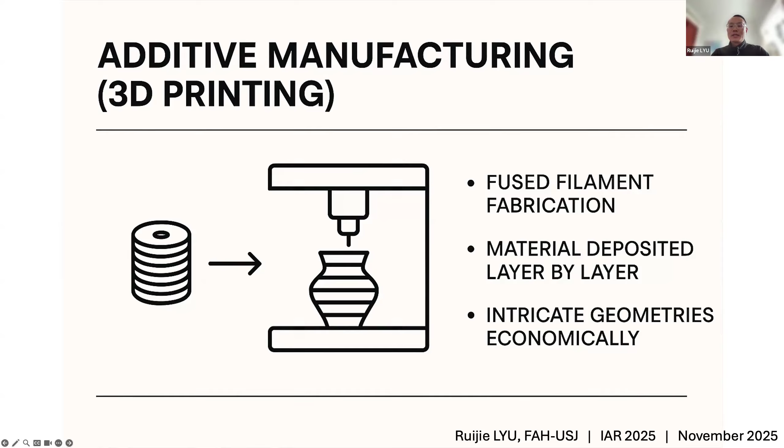Additionally, while it's great for prototyping and small batches, 3D printing is generally slower than traditional methods, making it less efficient for large-scale manufacturing.

Now let's go to validating design intent. In this part, we address the systematic barriers that prevent computational designs from transitioning to full-scale architectural projects. These barriers are not merely technical limitations, but also involve economic, regulatory, and cultural obstacles.

On the economic side, high initial costs, fragmented supply chains for non-standard components, and the difficulty of scaling these technologies are key challenges.

Another major barrier is the lack of established regulations for new fabrication methods. Without clear building codes or certification pathways, digital designs may struggle to obtain necessary approvals or insurance, even if they perform well in prototypes.

The final challenge lies in cultural resistance from the construction industry. Many professionals are still reluctant to adopt these new technologies due to skill gaps and fear of change. Overcoming this resistance is crucial to scaling digital fabrication methods.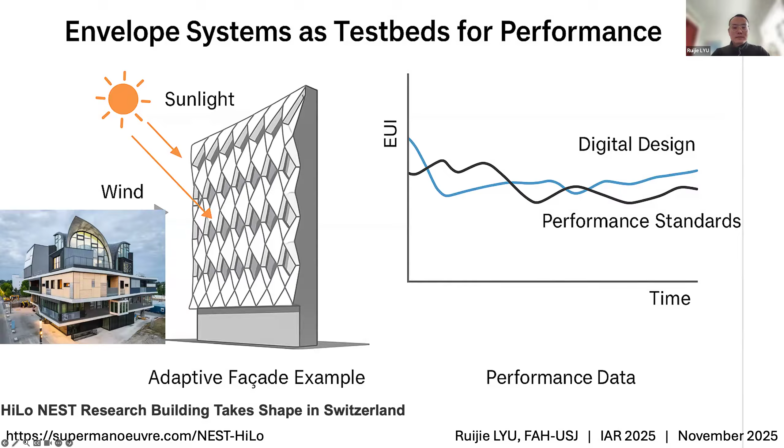Okay, let's go to the conclusion. As we wrap up this presentation, let's review the key takeaways and look ahead to the future of digital architecture. First, I've introduced the computational delivery framework, CDF.

This three-phase model maps the entire journey of design intent from conceptualization to fabrication and validation. It ensures that computational designs are not only novel, but also viable in the real world.

Secondly, we have seen how facades and roofs act as strategic test beds for validating digital designs. These systems provide a practical way to assess energy efficiency, regulatory compliance, and long-term durability.

Finally, I have proposed a shift towards performance-accountable innovation. In the future, generative designs must not only be innovative, but also certifiable, insurable, and maintainable across their life cycle.

Here are some future directions. In conclusion, the future of digital architecture lies in balancing generative complexity with practical accountability. Through better integration of performance metrics, regulatory compliance, and lifecycle management, we can achieve truly sustainable, resilient buildings that are capable of meeting both innovation and real-world demands.

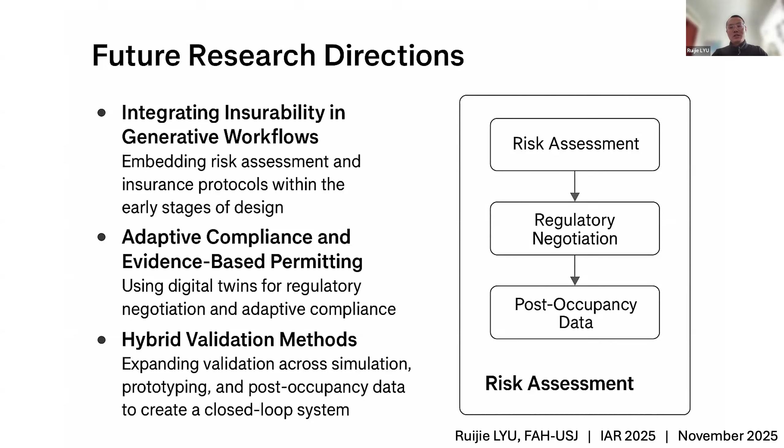Okay, thank you. This is my presentation.

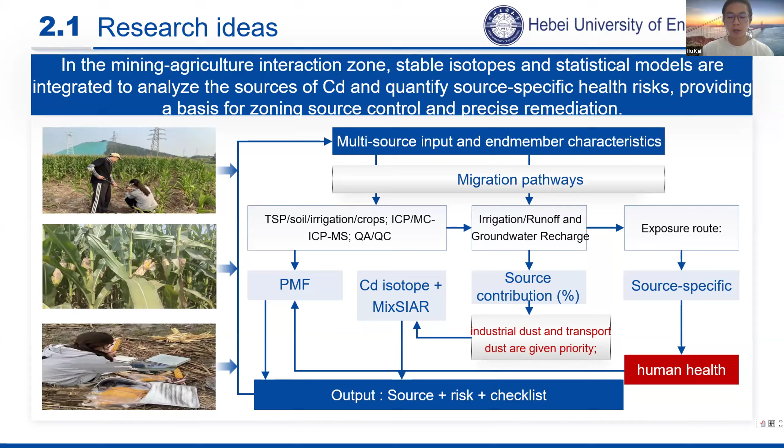To answer this, we developed a rigorous technical route: end-member identification, multi-model source analysis, and source-specific risk assessment. Traditional methods struggle to distinguish overlapping pollution sources. Therefore, we integrated stable Cd isotopes with statistical models like PCA and PMF.

Specifically, we utilized MixSIAR model-based isotope mixing models to quantify source contribution with higher precision. We conducted multi-medium sampling, including TSP, soils, irrigation water, and crops, to construct a reliable end-member library.

Moving on to the research content, we first analyzed the source-migration-exposure mechanism. We identified the main inputs: industrial dust, including coal gangue, transportation, and agricultural inputs. Our source profile analyzed 0 to 80 cm, revealing significant Cd accumulation in the topsoil layer.

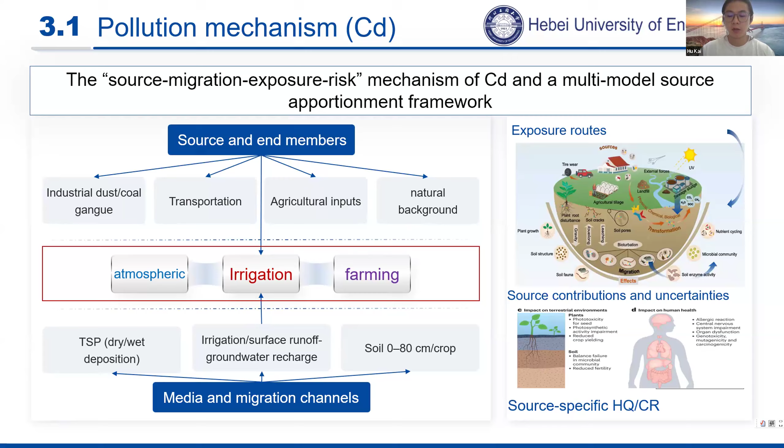This vertical distribution pattern strongly suggests anthropogenic input rather than geological background. Correlation analysis further confirmed that Cd behaves differently from other metals, indicating unique mining-driven source profiles.

Industrial activities related to mining and smelting are the dominant source, contributing between 49.5% and 52%. Atmospheric deposition is the second largest contributor, accounting for 36.1% to 38%. Traffic sources contribute approximately 9.5% to 10%. This data confirms that industrial emission and atmospheric deposition are the absolute primary drivers of Cd pollution in this region.

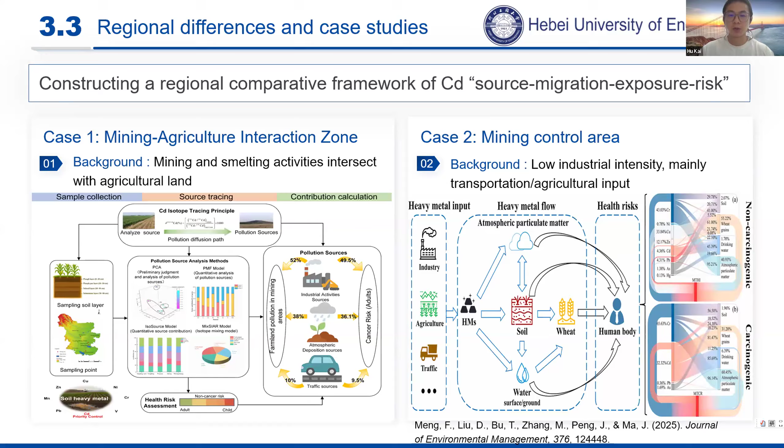Based on this source apportionment, we conducted source-specific health risk assessments. The results are alarming for non-carcinogenic risk: the hazard quotient for children is 3.8, far exceeding the safe threshold of 1. For adults, it's 1.2. For carcinogenic risk, the value is 2.1, which is also above the acceptable limit.

Our analysis identified that the dietary intake pathway, specifically consumption of locally grown crops like wheat, is the primary exposure route. This highlights the urgent need to cut off the transfer of Cd from industrial dust to the soil-crop system.

To summarize our study, we successfully established a concentration-statistics-isotopes-risk framework. This framework effectively resolves the complex source attribution in mining-agricultural interaction zones. We confirmed that industrial activities and atmospheric deposition are the dual primary sources of pollution.

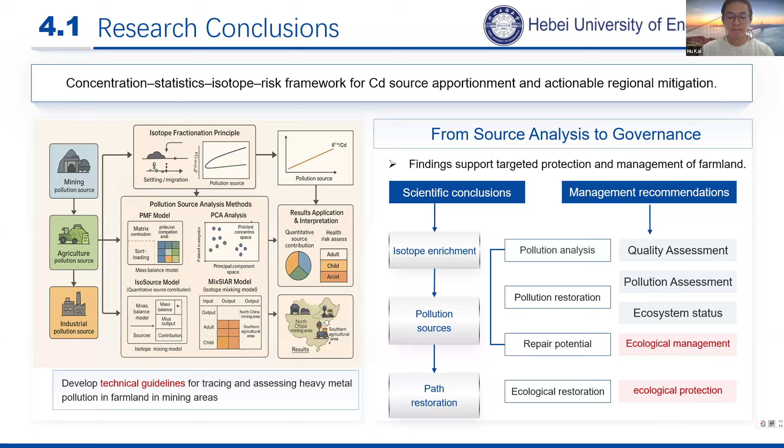We provide the theoretical basis for mining soil control. Mitigation strategies must focus on suppressing industrial dust and managing coal gangue to protect food safety. This workflow is reproducible and can be applied to similar regions globally.

That concludes my presentation. I would like to thank EEUPD and Hebei University of Engineering for their support. Thank you for your attention.

Okay, thank you so much, Mr. Kai Hu from Hebei University. It is a very informative presentation.

Since I am from a quantity surveying background, this research topic is not very familiar to me, but I believe it has a lot of very informative information that could impact sustainability and maybe reduce the issue of pollution, and give a good impact towards the environment.

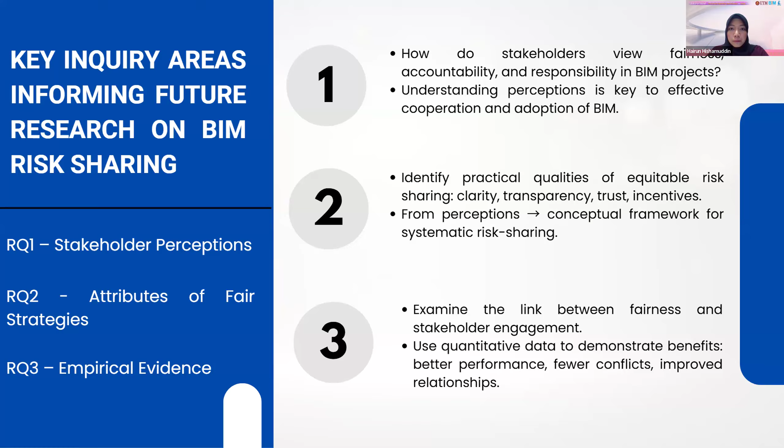For this part, I will summarize. Right now, many contracts do not support BIM properly. Some key issues include the BIM model is not legally recognized. Many contracts still rely on paper documents, so when something goes wrong in the BIM model, no one is sure who is responsible.

BIM rules and responsibility are unclear. For example, the information manager role is often not clearly defined. There's also different standards used in different projects. Without standardization, disputes easily occur, and most standard contracts are outdated. Contracts like FIDIC, PAM were never designed for BIM. Even when BIM protocols are attached, they often do not have legal strength. Because of these barriers, stakeholders end up guessing responsibilities or shifting blame, which leads to conflict rather than collaboration.

Previous research identifies major categories of BIM-related risks. First, BIM and contractual risks, which include unclear ownership, unclear IPR, and uncertain liabilities. Technological risks, data-related risks, for example data loss, manipulation, organizational risks like poor leadership, unclear rules, or resistance to digital change, and financial risks, where BIM requires hardware, software, and training, and these costs can be high.

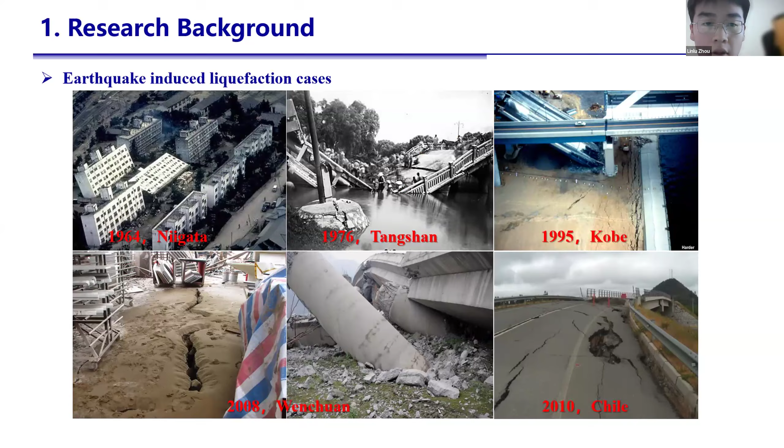Current studies on the liquefaction resistance of sand mainly rely on experimental methods such as cyclic triaxial test, shaking table test, and cyclic simple shear test. Numerical approaches primarily include finite element method and discrete element method.

Next, I will briefly introduce our experimental investigation on improving the liquefaction resistance of reinforced sand. We conducted the cyclic triaxial test and reinforced the sand samples using sisal fibers and geotextile. The tests were performed under strain-controlled loading.

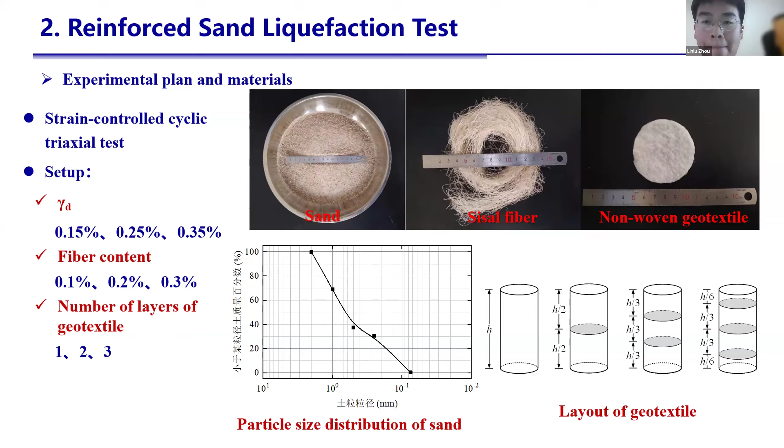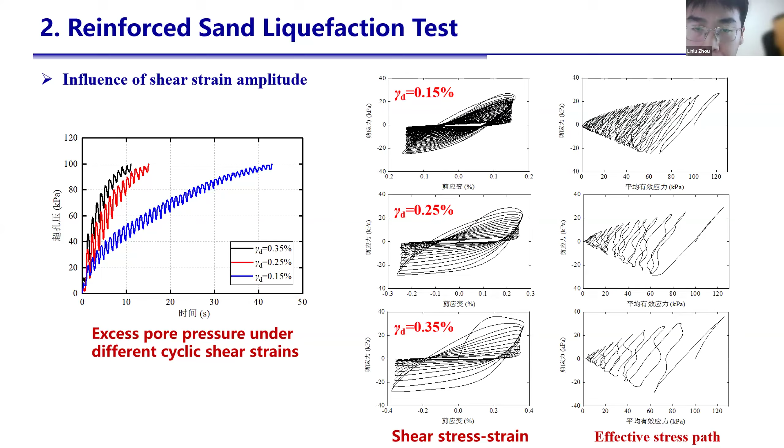Next, I will present the numerical simulation of the liquefaction resistance test. In our numerical model, we use a fluid-solid coupled element to represent the soil. The modeling concept represents the stress state along the maximum shear stress plane in the triaxial specimen.

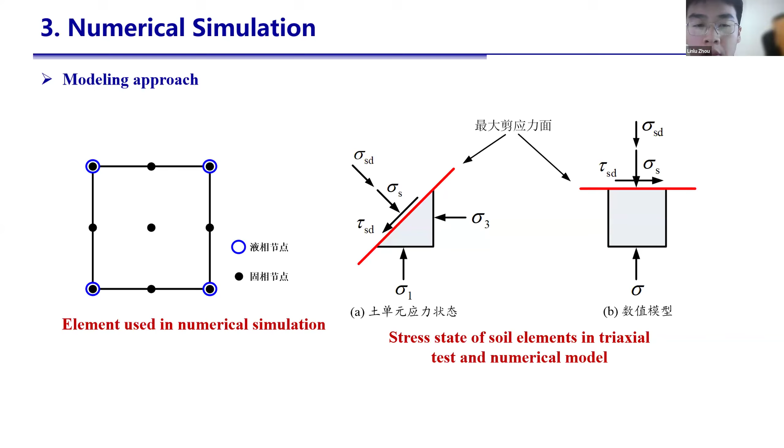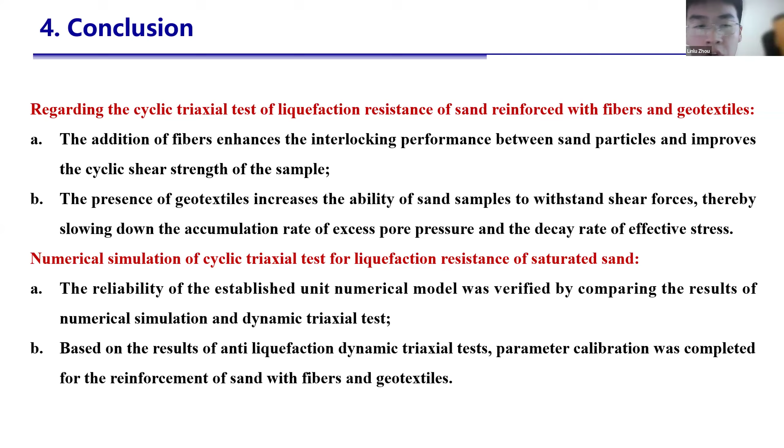Finally, let me summarize our findings. Both the liquefaction resistance test and numerical simulation provide valuable insights into the mechanism and improvement of sand liquefaction resistance. That concludes my presentation. Thank you.